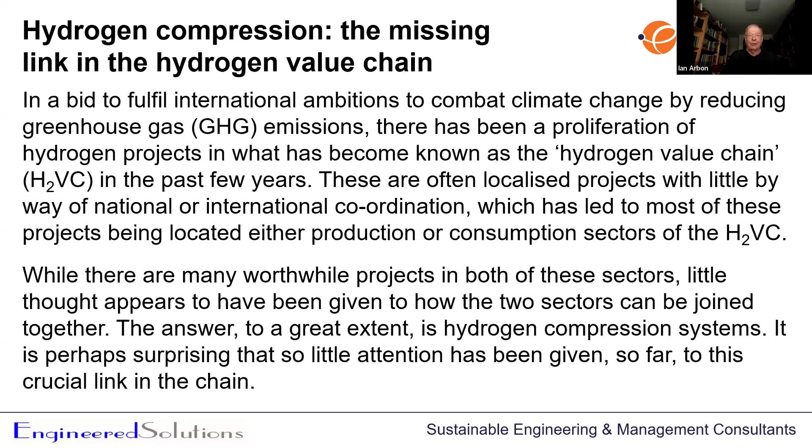And while there are certainly many worthwhile projects in both of these sectors, and I'm not in any way denigrating them, little thought appears to have been given to how the two sectors can be joined together. The answer, to a great extent, is hydrogen compression systems. It's perhaps surprising, at least to me, that so little attention has been given so far to this crucial link in the chain. I say again, without compression, this is not going to work. And we've got an awful lot yet we need to learn on that compression duty.

We had a rather unwieldy title on this one, which might explain why it hasn't been a bestseller: Application of Life Cycle Assessment Methodology to the Understanding of the Energy Balance and Efficiency of Hydrogen Value Chain Building Blocks. We now generally refer to it in the report as the Energy Balance Research Report. I had the privilege of being the chair of this particular working group, and it was breaking a lot of new ground in looking at whole life cycle assessment, which isn't commonly done in projects like this. So I'd certainly commend it to you.

This report was commissioned from Genesis Consulting, and it was published in May 2022. So it's been around for over 2 years now, and we drew very heavily on it in our current report.

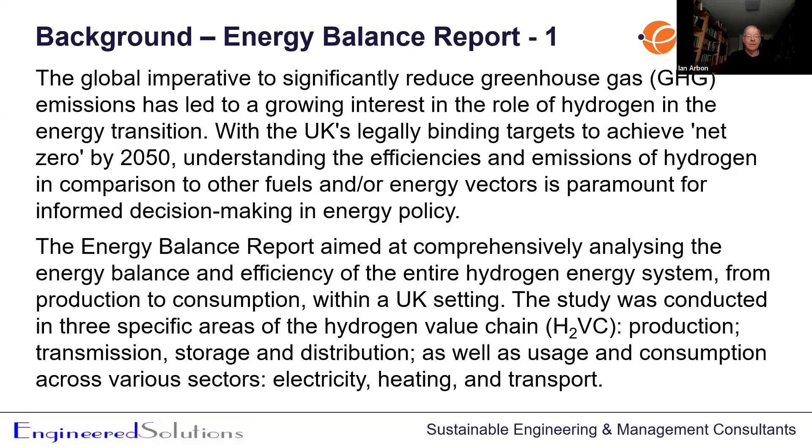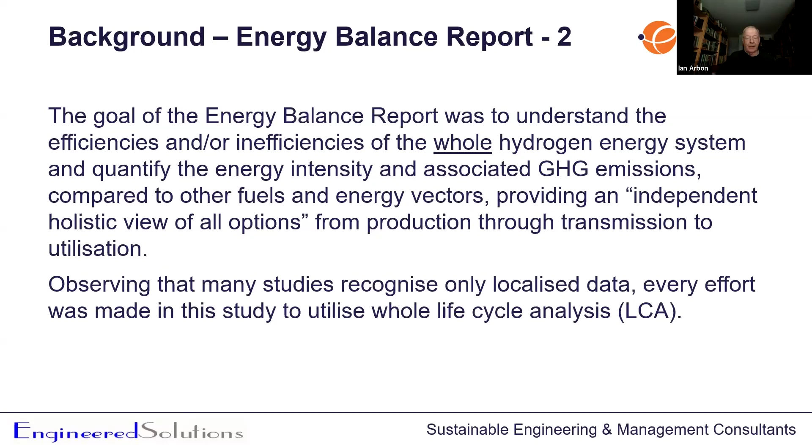The goal of the Energy Balance Report was to understand the efficiencies and inefficiencies of the whole hydrogen energy system and quantify the energy intensity and associated greenhouse gas emissions compared to other fuels and energy vectors, providing an independent, holistic view of all options from production through transmission to utilization. Observing that many studies recognize only localized data, every effort was made in this study to utilize whole life cycle analysis, or LCA.

I just wanted to put in a disclaimer here, lest anybody think otherwise. As with all Energy Institute publications, great care was taken with both reports to accurately present the salient facts emerging from the research to enable correct decision-making to be based on presented facts. These reports do not presume that hydrogen is the correct answer to the question, as some do, but they present data to enable readers to make their own informed decisions.

It's not part of our role to push hydrogen, but to say what you need to consider if that's what you have decided is the right answer for your project. There was no pressure from any quarter on either report to influence the data presented in them or in any way to support other predetermined decisions made without the relevant facts having been available and considered.

And just an update regarding COP28, because that was after the Energy Balance Report was written or published. Until recently, energy efficiency has been a largely overlooked area of the energy transition and indeed of UK energy policy, with some practitioners claiming it is a less important measure than others. However, the largely unexpected wording of the pledge signed by the UK and many other countries at COP28 in Dubai in December last year, that we must double the global average annual rate of energy efficiency improvements from around 2% to over 4% every year until 2030, has raised the significance of energy efficiency to an unprecedented new level. Although published well before COP28, this pledge has made the Energy Balance Report of even more relevance to the hydrogen value chain. I spoke on this very subject at the International Energy Week earlier this year.

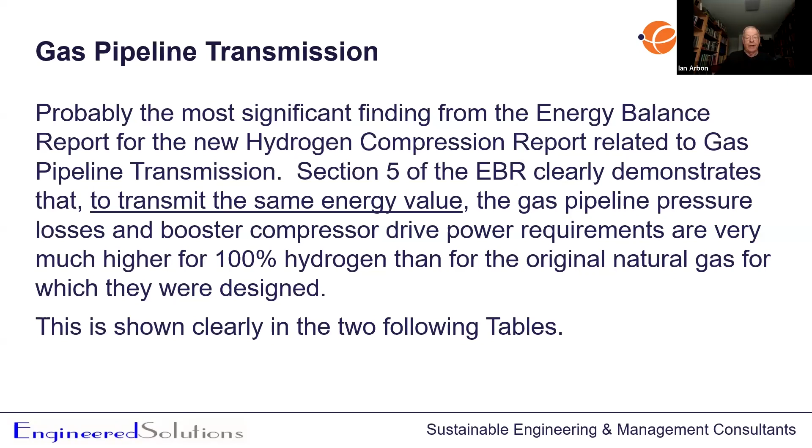Probably the most significant finding from the Energy Balance Report for the new hydrogen compression report related to gas pipeline transmission. Section 5 of the EBR clearly demonstrates that to transmit the same energy value as we do today, the gas pipeline pressure losses and booster compressor drive power requirements are very much higher for 100% hydrogen than for the original natural gas for which they were designed. This is shown clearly in the two following tables.

These are tables taken from the Energy Balance Report without alteration. The first one is repeated in the new report, which you'll be able to look at. It shows transmission pipeline pressure drop per kilometre for 100% natural gas, a 20% hydrogen blend, and 100% hydrogen. We're looking at those three cases, with operating pressure in each case being between 40 and 70 bar at suction and discharge. The main thing I want you to notice here is the flow rate, measured in million standard cubic feet per day.

That's an industrial American measure, which we don't normally use, but it seemed the right measure at the time. You'll see that for 100% natural gas, for the same energy value, in all cases we were compressing 1,500 million standard cubic feet per day. When we move just to a 20% hydrogen blend, we need to allow for that dilution of energy transmitted in the gas flow, and so that figure rises to 1,743 million standard cubic feet per day. And when we go to 100% hydrogen, which we found quite startling in this report, we need as much as 4,877 million standard cubic feet a day just to get the same flow, the same energy value in the flow.

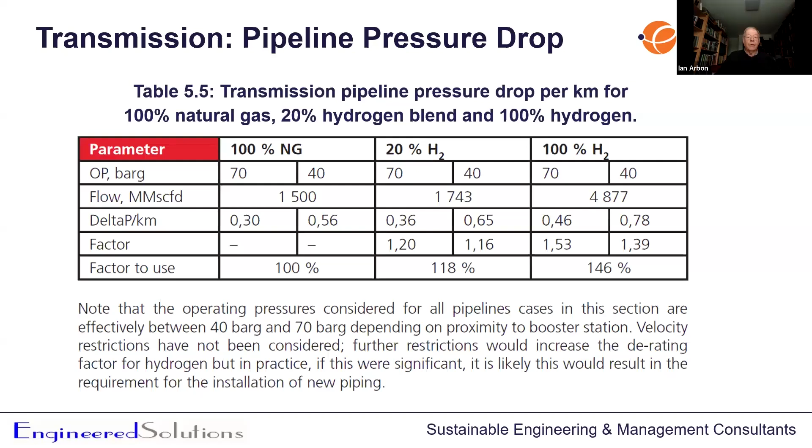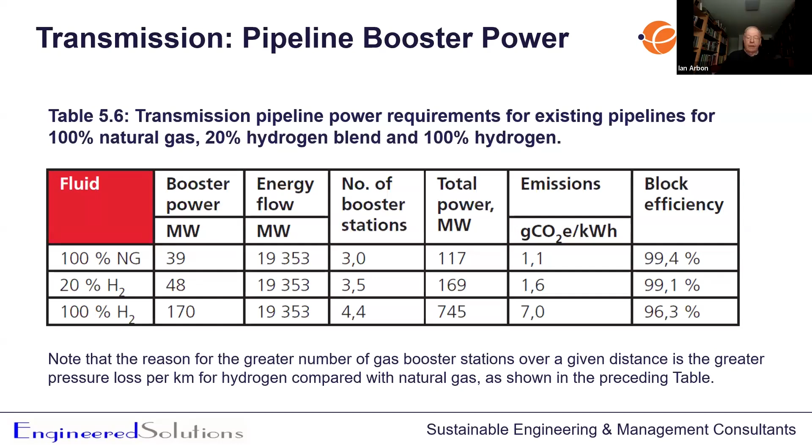If you'd go to the next slide, please. There's a bit missing at the top there. Not sure how that happened, but I can explain it.

Anyway, so in the second column over, which is the figures from the tables you've just looked at, you can see the 100% natural gas case, Genesis estimated 39 megawatts. For the 20% hydrogen case, they had 48 megawatts, and for the 100% hydrogen case, they had 170 megawatts. We've assumed that.

Now, the third column across is where we decided to reduce those figures. Genesis did in-house calculations on this, so I'm not saying how accurate they are, I just don't know. But we took their figures and reduced them by 10%, because they included all sorts of auxiliary power requirements that you have on these sites rather than looking at the actual gas compression case itself. So the third column shows all of those figures reduced by 10%.

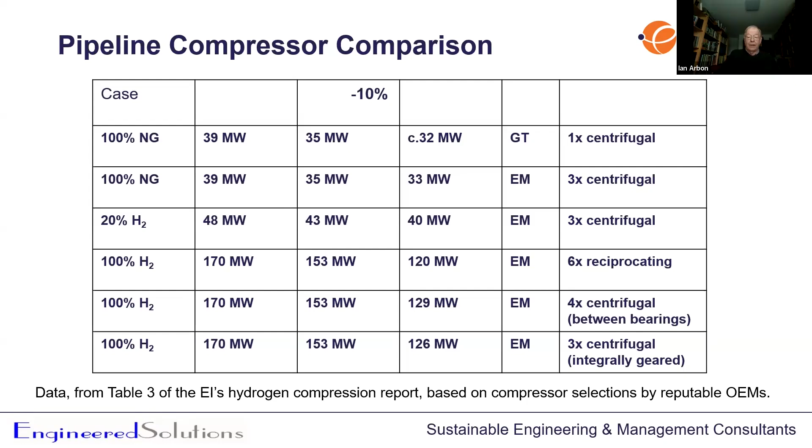Next, please. Right, now the reason for this is we need to look at the physical properties of hydrogen and those for natural gas. And if we could go on, please.

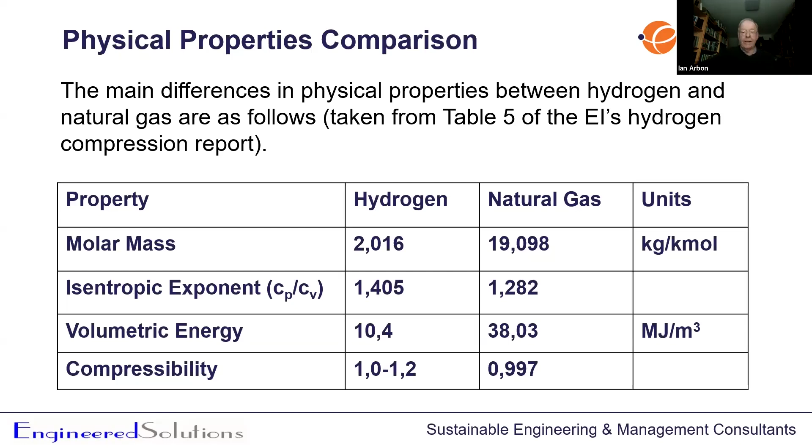So, as seen from that table, the main reason for the very much higher flow rates is the volumetric energy, and I've talked about that, so won't repeat it. This is not a factor that can be considerably reduced by more research and development. It is subject to the laws of physics. Of course, improvements can be made with compressors, and that's what we do in the compressor industry. But the main thing we're dealing with here is the laws of physics.

Proposals, for example, to repurpose natural gas pipelines for ultimate use with 100% hydrogen must take these laws into consideration. Some other current reports appear to almost ignore the different physical characteristics of hydrogen or gloss over the issue entirely, which is why we're majoring on it in this report.

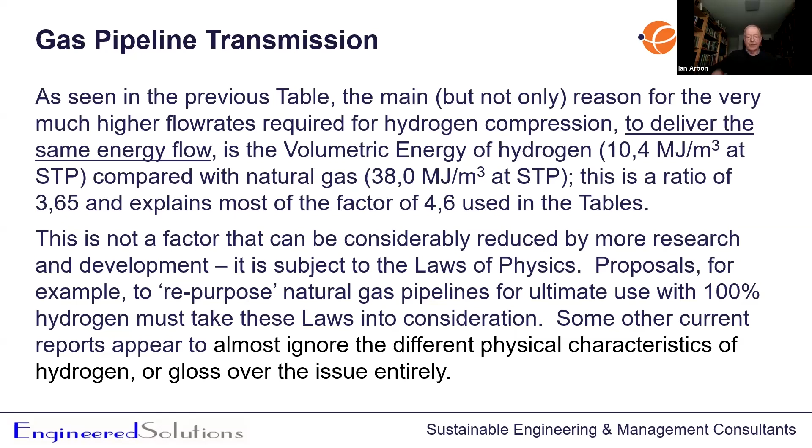So, hydrogen compression report: the compressor duties within the hydrogen value chain.

This is a sort of infographic that we came up with for the report, and I don't claim ownership of this. We based it on a concept developed by the Austrian valve and compressor valve manufacturer Hoerbiger, who were of enormous assistance to us in the report, and have permitted us to use this. What it shows is the hydrogen source on the left, the storage and transmission in the middle, and the industry as the end users on the right.

And you see the six compressor applications that we've picked there. Before anybody says to me, well, there are going to be more than those - yes, I know that. There's an almost infinite number of permutations you could have. But to try and explain this, we've picked six, and we hope those are illustrative enough. In the top left-hand corner, you've got the production of hydrogen from renewable energy via electrolysis, and that creates the hydrogen, depending on the technology you use, somewhere between 1 and 40 bar.

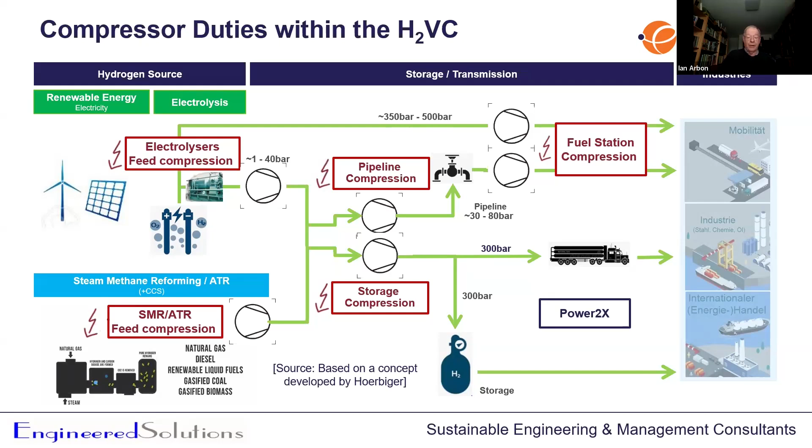So these are the six duties we're looking at, starting with the largest ones, very high flow rate machines, the NTS pipeline booster compressors, working roughly between 30 and 80 bar, going down to the compressors for geological surface storage, also very high flow rate machines, going up to 300, 350 bar.

Then between those, you've got the feeder compressors for blue hydrogen and feeder compressors for green hydrogen, and you can see that concern there on green hydrogen is getting that 1 bar suction up to something much more commercially viable, because it really cannot justify compressing hydrogen from those very, very low pressures.

And then looking at refueling station compressors, going again from electrolysis up to 350 to 500, or if the pipeline is there, from 30 to 70 bar up to 350 to 500. And that's the range we've looked at in the report. Thank you. Next, please.

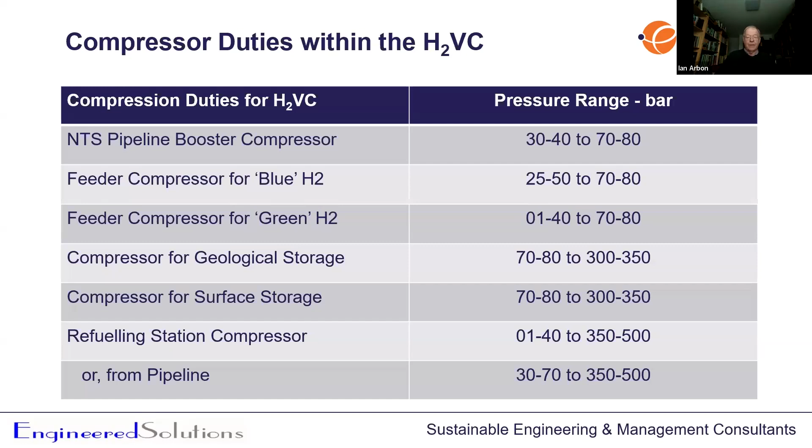So, compressor types used in the hydrogen value chain. Next, please. I've referred to these already, but let's look at them in a bit more detail.

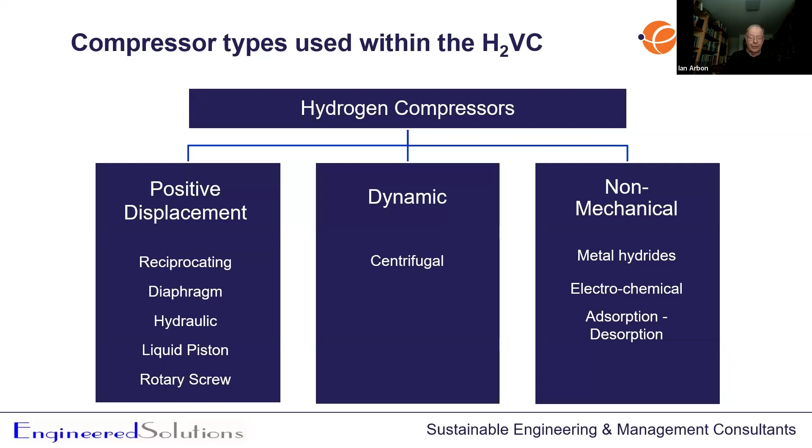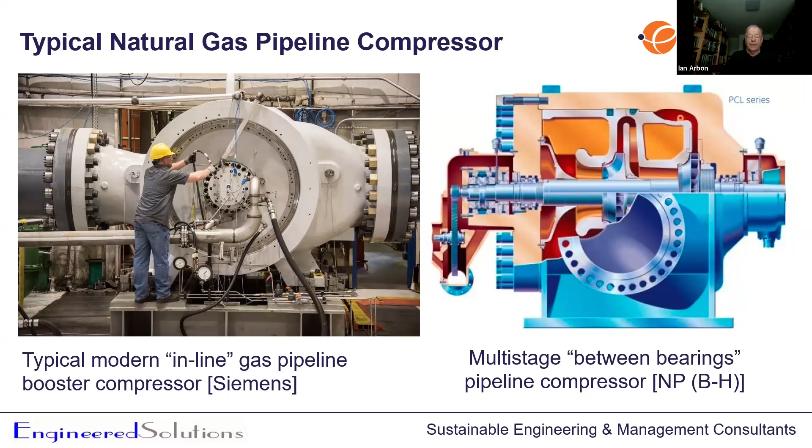And this is the hermetically sealed centrifugal compressor, motor driven, which I mentioned earlier in the tables, which can do up to a 20% hydrogen blend. This is a compressor called MOPICO, which comes from one of my former employers, MAN, where I cut my teeth on centrifugal compressors. Next, please.

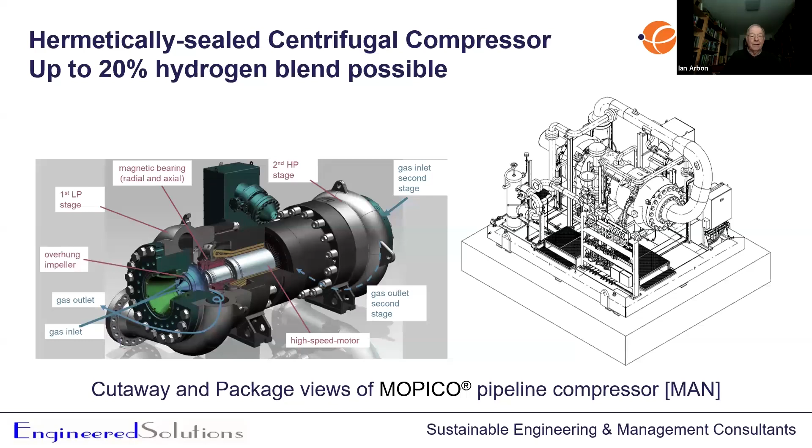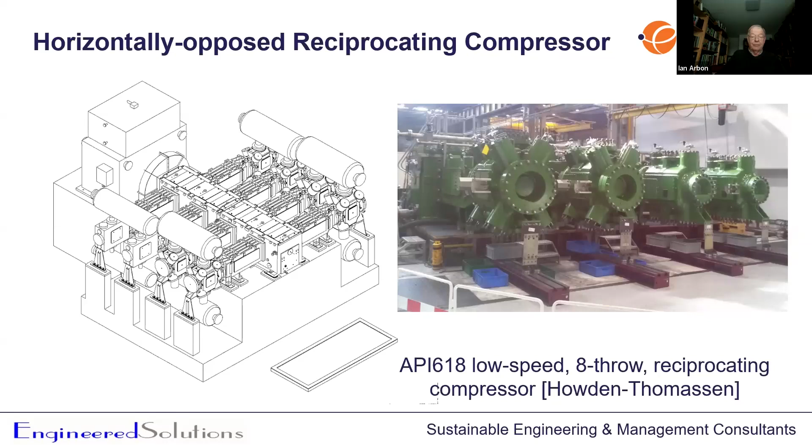So then we come to the horizontally opposed reciprocating compressor that I mentioned earlier, where we needed 6 of these to replace one traditional gas pipeline compressor in the 100% hydrogen case. You see a typical eight-throw compressor on the right, and a version we would use in the 3D drawing on the left, showing the compressor, the central crankcase with the pistons, the cylinders on the outer edges, with pulsation dampers above and below them. Each one takes up a very large physical footprint, and we would need 6 of those. You begin to understand how different these compressor stations are going to be. This particular one is from the Thomassen division of Howden. Next, please.

And this is a traditional between-bearings multi-stage compressor, but designed for 100% hydrogen. This particular one is from Baker Hughes.

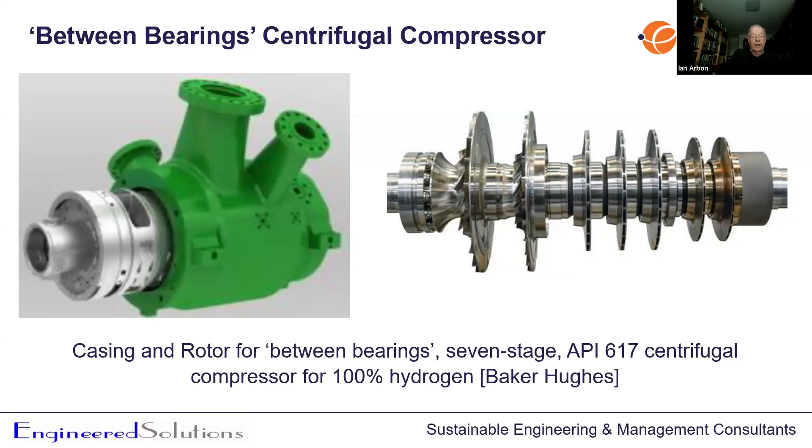If we go on to the next slide, this is a very interesting graphic that I wanted to share with you for a couple of minutes, where you can see along the top, the hydrogen blend in mole percent, ranging from 0% hydrogen, in other words 100% natural gas, all the way up to 100%, which is what we're aiming for.

It shows with a standard pipeline compressor, with the impellers running at a typical circumferential velocity or tip speed of 250 meters per second, you would perhaps in a given application need 3 impellers to achieve the pressure ratio you were looking for.

If you were to look at the second row down, increasing that tip speed to 300 meters per second, which is going further than the process industry or API standards would want you to go at the moment - so there's some considerable rethinking to do there - you could reduce that to 2 impellers.

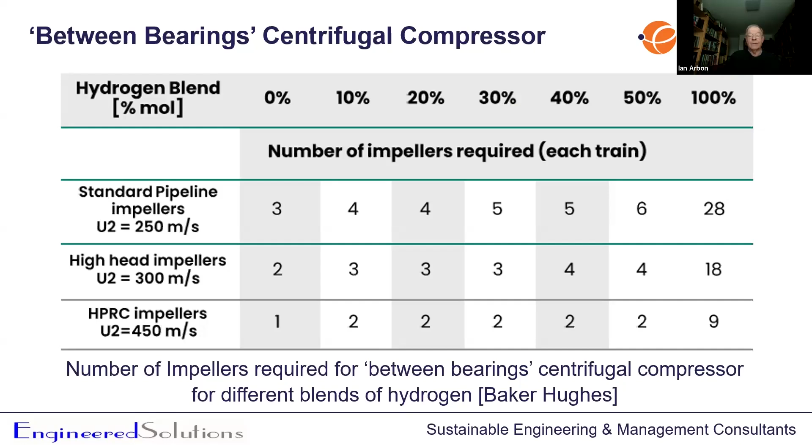Next, please. So this is the integrally geared 8-stage machine that we used in our report. You see the plan view on the left, and here's an example of the compressor on the right.

Now it's a little different from what we would use - this was the photograph I had. It's different from the one we would use in the hydrogen application, in that we wouldn't be using all of these intercoolers, the big yellow things you see on the left of the picture. But it does show the size of the compressor, standing on top of the table foundation, and you can see from the size of the guy working on it that this is a much bigger application than we see in present configurations, and we would need 3 of these to do that 100% hydrogen duty.

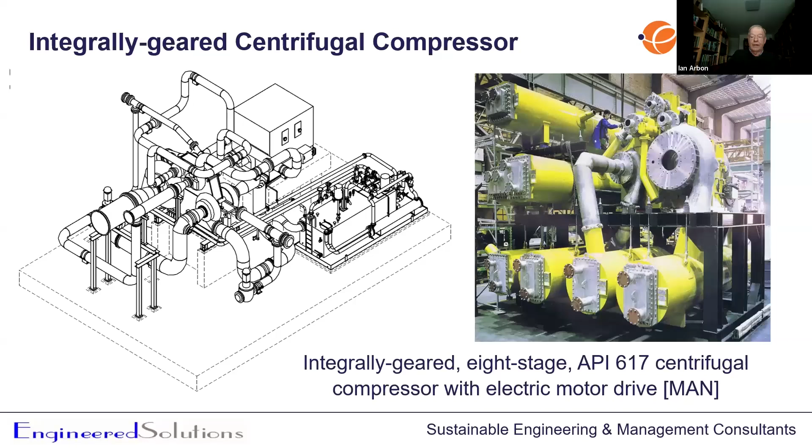So just to give you an idea of the scale. Next, please.

Right, just looking at some lower flow positive displacement compressors - this is easier to do because we can purpose design these for 100% hydrogen from the beginning. Here you see some of the options that I mentioned in the introduction.

On the left, a vertical reciprocating compressor, the compressor from the Ariel Corporation in the United States, packaged by Hoerbiger that I mentioned earlier. On the right, a typical ionic liquid piston compressor package from Linde. Next, please.

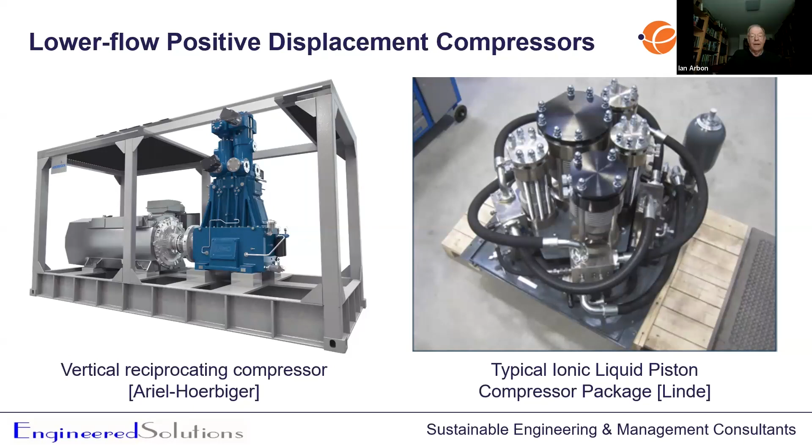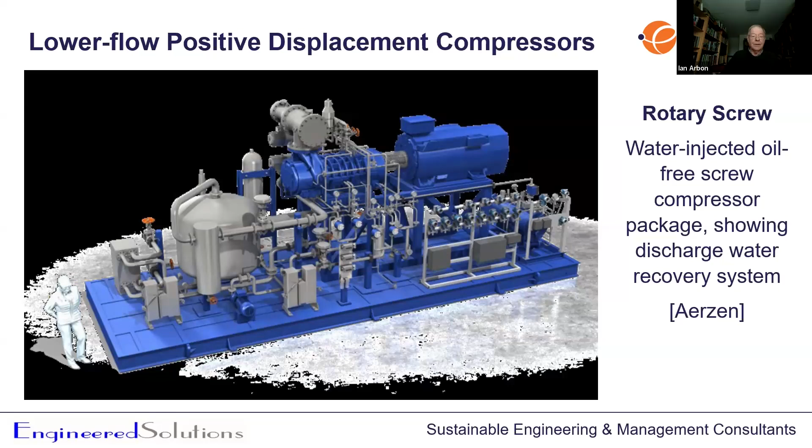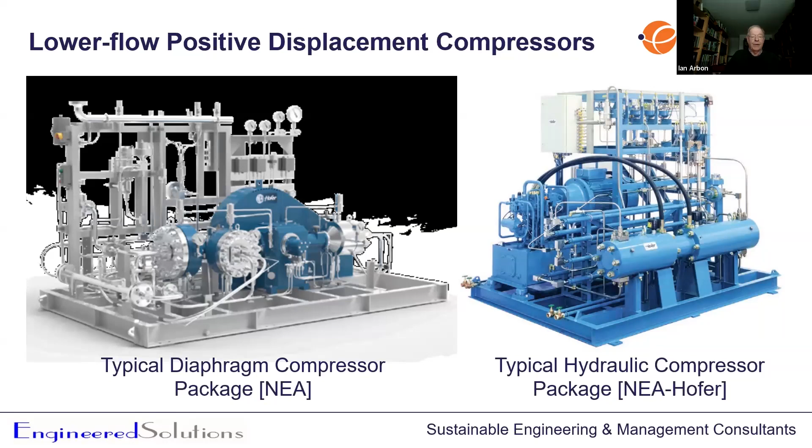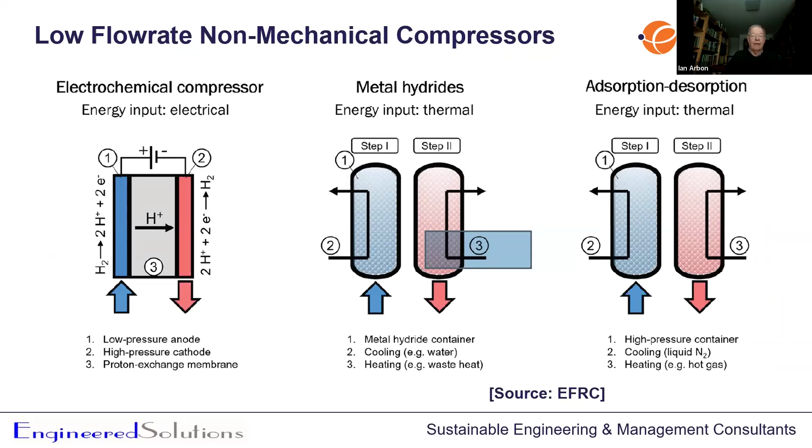And on the right, from another division of the same company, a typical hydraulic compressor. I'm not going to say any more about these. They are all covered in quite a lot of detail in the report, so I'd encourage you to read it. And here, finally, the non-mechanical compressors, and I don't have anything more to say about them. We'll cover them in the report. I'd refer you to that.

Safety and sustainability, two very important aspects of all of this.

Section 6.3 of the hydrogen compression report looks at a number of safety considerations for hydrogen compressors, specifically containment, leakage and flammability, explosion risk, and electric motor drives. Now, this is a relatively brief summary. We haven't made it brief because it isn't important. It is super important. But we recognize that the Energy Institute is developing a number of other publications which cover safety in much more detail across the hydrogen value chain, and I'd refer you to those. We are in no way underplaying the importance of safety with whole hydrogen systems. It's absolutely crucial to its success.

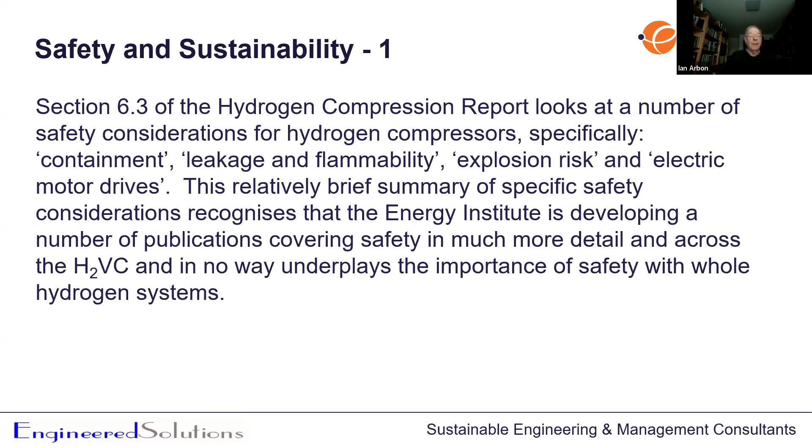A whole section 9 of the hydrogen compression report is devoted to sustainability issues for hydrogen compressors. Although this is still a fairly unusual topic in most technical reports in the UK, the days when sustainability can merely be treated as an afterthought are over, and this should always be considered in future. Sustainability issues covered in this report are materials of construction, manufacturing methods, and operating fluids. You might say, well, you're a sustainability consultant, and you would say that, wouldn't you? But really, sustainability is being considered much, much more than we've ever done before. Without it, we're not going to be successful in this business.

Brief conclusions from the reports.

These are by no means all of the conclusions in the report, but I wanted to pick out some of general interest. First, repurposing of existing gas pipelines, a question we're asked all the time by many people and groups. The concept of repurposing existing natural gas pipelines is a good one, and I want to stress that. In many ways, it meets modern sustainability criteria, for example the UN Sustainable Development Goals, better than building a brand new gas pipeline where you've got the emissions and material usage on a very much larger basis.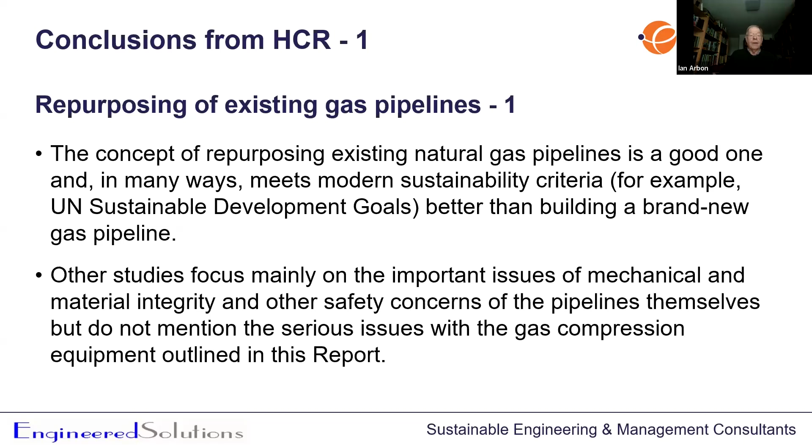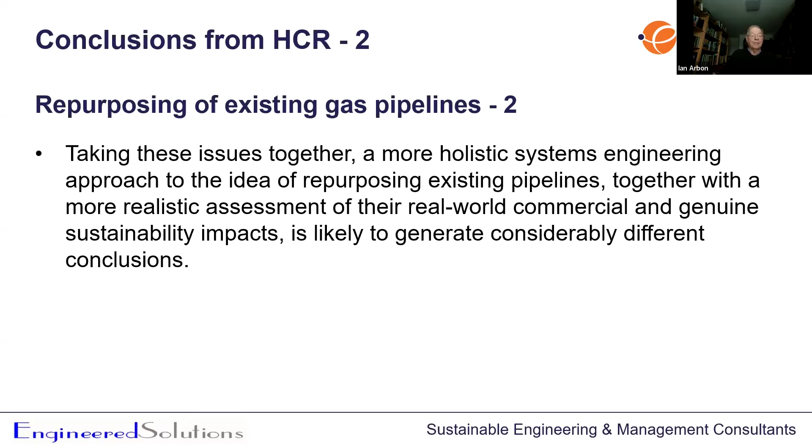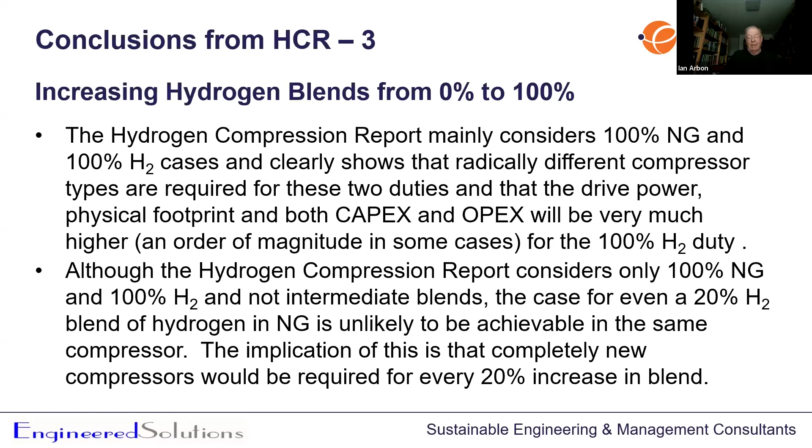Although the report considers only 100% natural gas and 100% hydrogen, not intermediate blends, there is mention of the 20% blend, as I said before. But the case even for a 20% hydrogen blend of hydrogen in natural gas is unlikely to be achievable in the same compressor. The implication is that completely new compressors would be required for every 20% step increase in the blend.

Whatever storage you use and wherever it is, it's not necessarily going to be in a convenient place for either production or usage, so you will need pipelines to get you to and from the storage place.

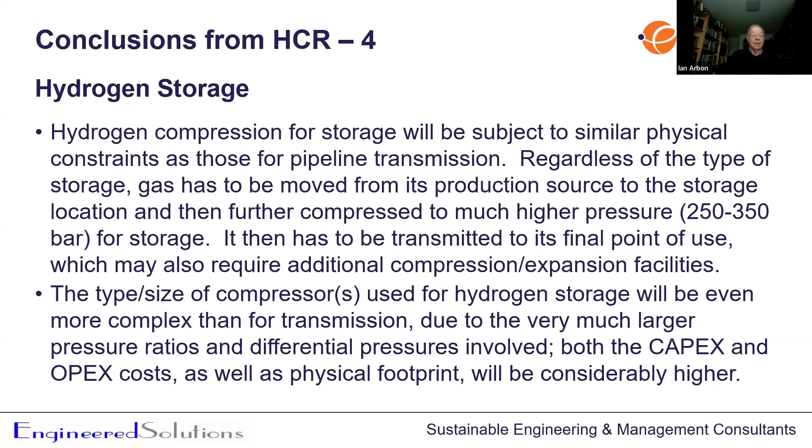So, future hydrogen compression technology at smaller scale - we've looked at some of these things in the report. At smaller scale, there are various existing suitable mechanical technologies and multiple vendors. The main requirement for this sector will be making a compelling, internationally agreed safety and sustainability case for their use in 100% hydrogen duty. Non-mechanical compressors are in development, but it's much too early to know what impact these will have on the market at this stage.

At larger scale, reciprocating compressors are the only well-proven technology. There is an understandable desire to use centrifugal compressors in high flow rate applications - lower maintenance, higher availability, etc. But the length of time needed to make safety and commercial cases for these machines is unknown, as I've explained in the course. I think that's it.